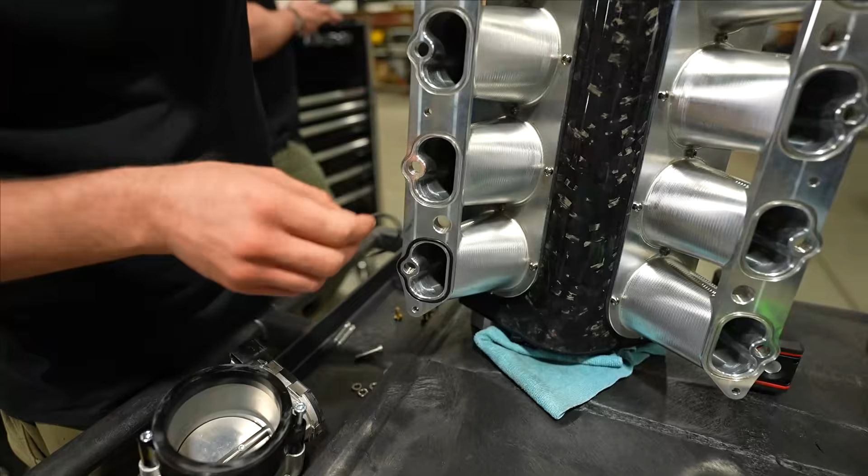All right, guys, today we're going to be testing our S650 carbon fiber intake manifold, obviously for the 24 and up Mustang. We've been working on tuning for a while to get the RPM and get the power curve where we want it with the factory manifold, and we're pretty happy with where it is. So we got that ironed out. We're going to swap over to our carbon intake manifold so we can get a nice comparison for you guys. So let's dive into it.

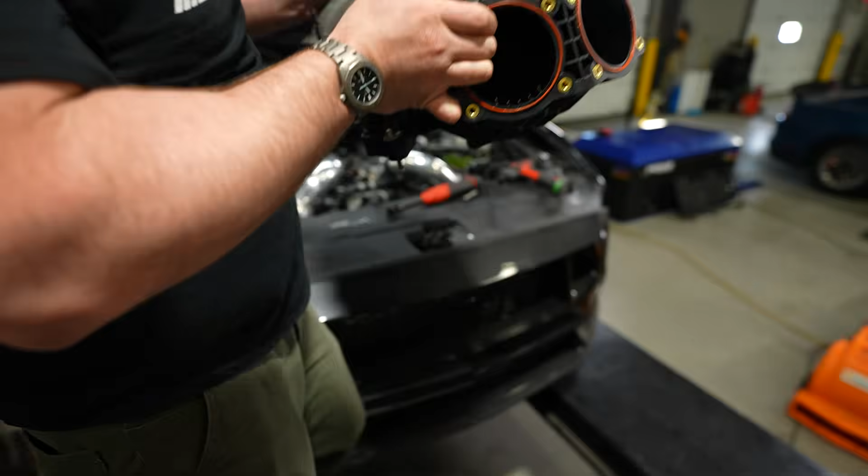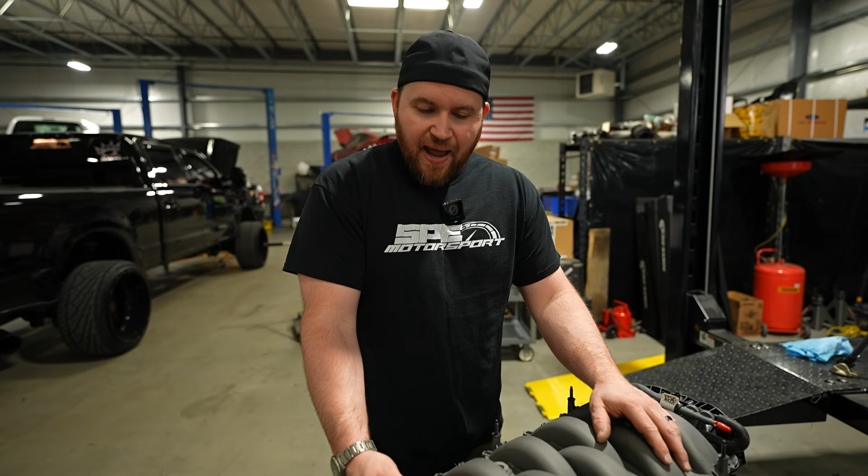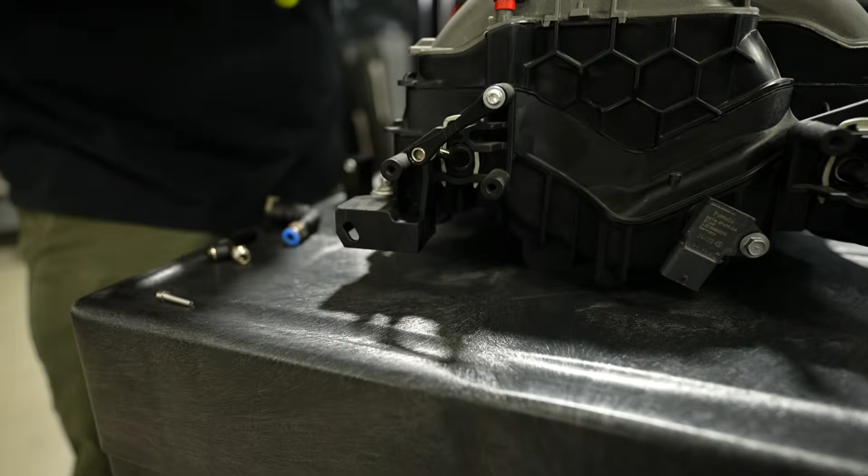So on the back you have IMRC canisters on the stock cars which actuate the IMRC flaps inside the intake manifold. So we have our lockout arms on it. This is something you're going to want to do in a boosted application. I'm going to take one of these off for you so you can actually see how this works and explain why you don't want it on a boosted car.

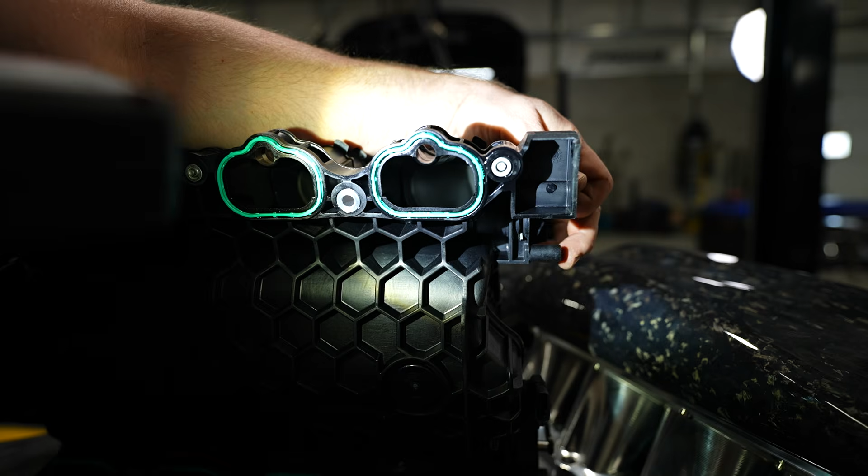All right, so the runner, when it's locked open, it looks like that. So that's basically wide open throttle. The top half of the RPM range, it's gonna look that way. At the bottom half of the RPM range, this flap's gonna be shut. And essentially what it does is it blocks off the intake runner, giving the engine a smaller intake runner, which therefore gives the motor a little more torque at the bottom RPM range.

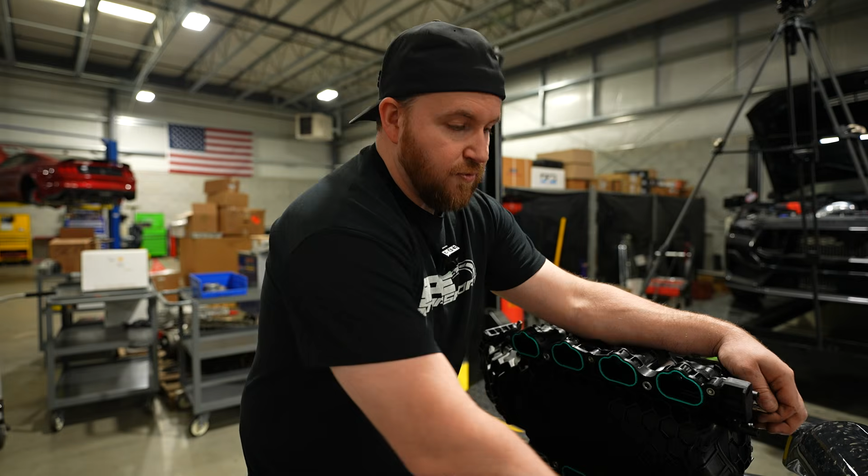So in a boosted application, when you're trying to build boost, you really do not want that runner shut because you're really impeding airflow. So that actually hurts getting the turbos into boost pressure. So these are really a necessary evil whenever you're running the factory intake manifold.

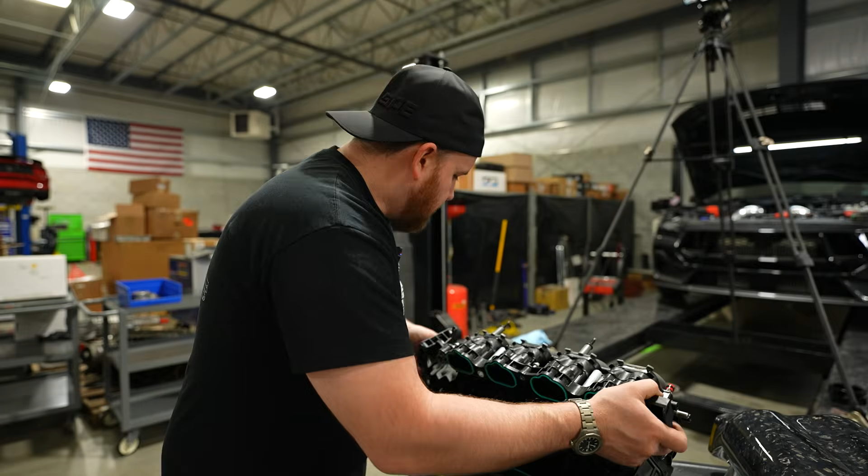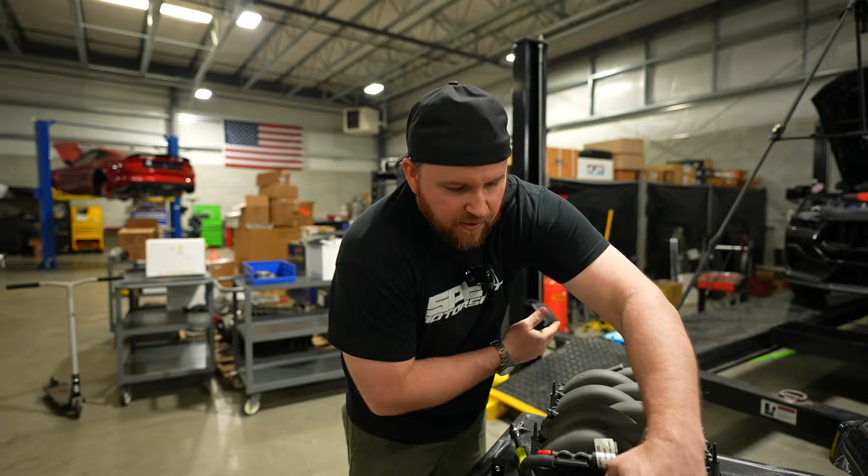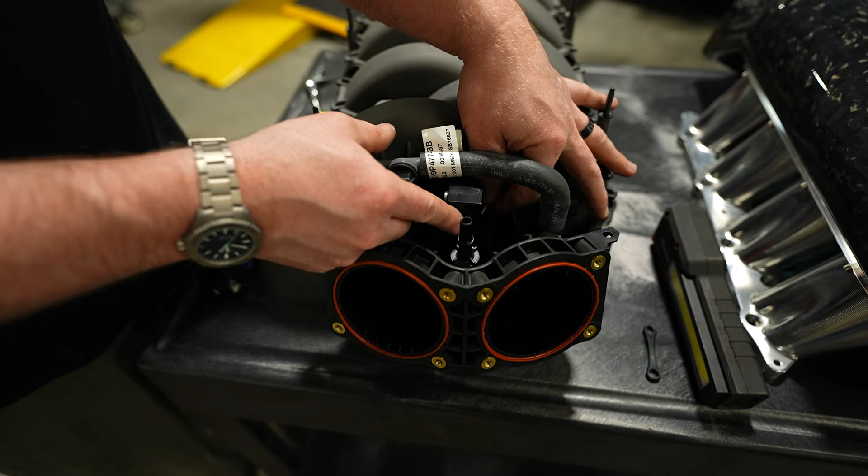The other thing that we have for a factory manifold, if you're going boosted application, on the front here, this is a vacuum line that will no longer be used for the crankcase vent stuff. So what we do is we make this block. It's real simple. It's got an O-ring in it. It acts similar to a quick connect, and it pops on here like that. You'll slide your bolt in to lock it down, and then you're able to use different fittings if you want to run a boost controller, a boost gauge, something like that.

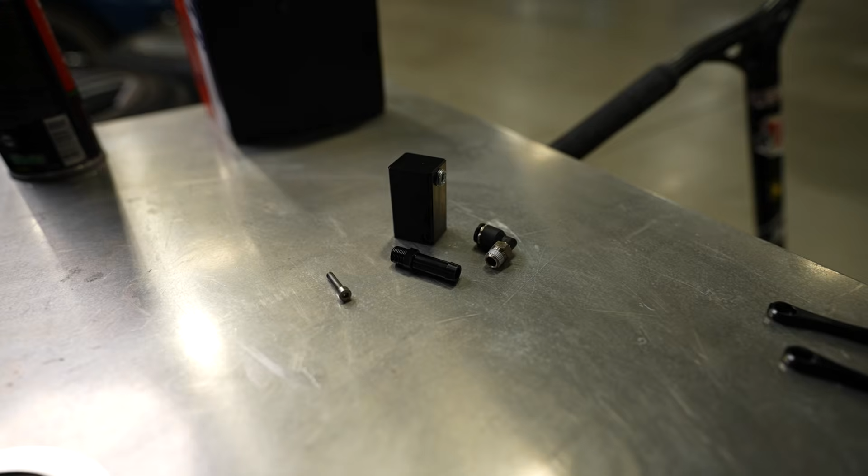You have different fittings, different hose options, and this basically converts this large quick connect over to an 1/8 inch NPT, and there's two connections on this block. The factory car has basically, let's call it a vacuum only sensor. So it'll read up to 1 bar, which is 1 atmospheric pressure, and then down from there. So essentially the factory sensor is able to read vacuum and up to 0 pressure.

When you go to a boosted application, more than likely your tuner is going to require you to change that MAP sensor. There's a lot of different options from Ford, MAP sensor wise, that you can be running. So this is an EcoBoost sensor that we end up having to cut the cage off of because they're real bulky and they're really long.

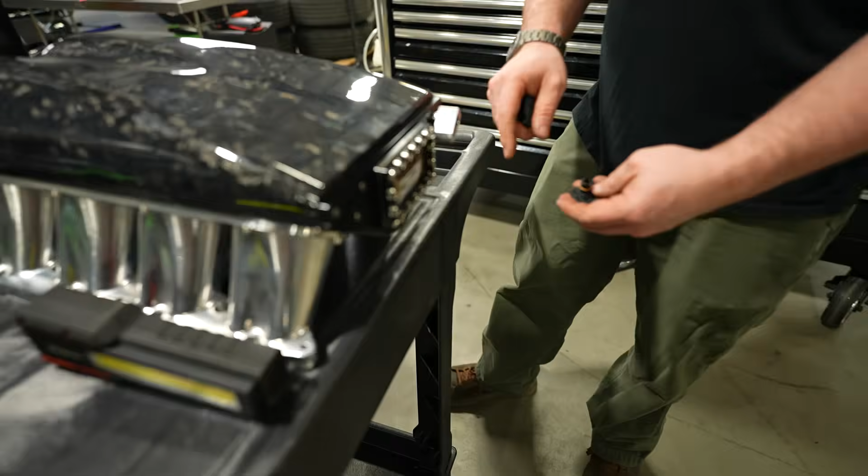The easiest way for us to deal with that, because of our adapter that we're running on the back of our intake manifold, it's obviously set up to run this bolt pattern for the sensors, the depth of it, we didn't want to make it too tall, too bulky, so it's easier just to snip the cage off. This is still really well supported. It's a temp sensor and a pressure sensor, so it does have a lot of support in there. It's still completely covered once you get it in there.

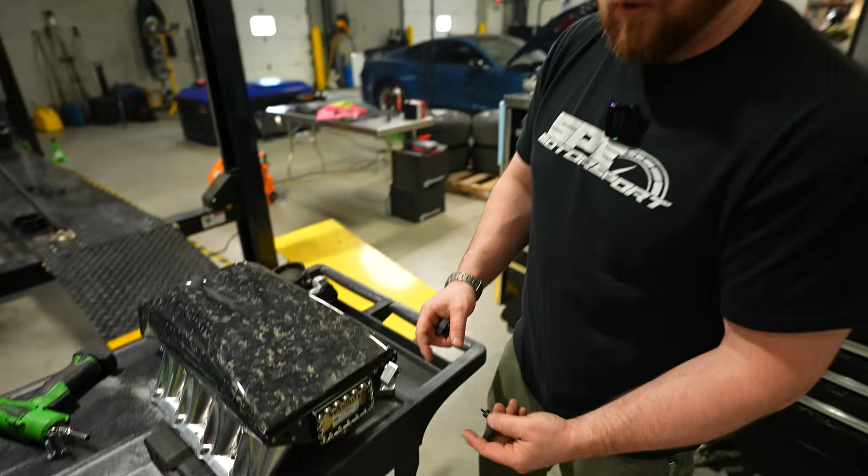So the whole point behind us doing this adapter was, if you ever switch the car over to a standalone down the road, or you need to do a different MAP sensor, you can literally unscrew this adapter, thread a standard 1/8 NPT MAP sensor in, and you're ready to go. So it gives you more flexibility. You can run factory sensor, you can run an aftermarket sensor in this manifold. It basically is designed to work with whatever you want to run. We're gonna go ahead, swap all this over, get it on the car.

All right, guys, we got the carbon intake on the S650. Everything's good, checked for leaks. We're solid, we're good to go. We're gonna show you guys the clip of the original intake, the stock intake manifold, show you the power numbers it made.

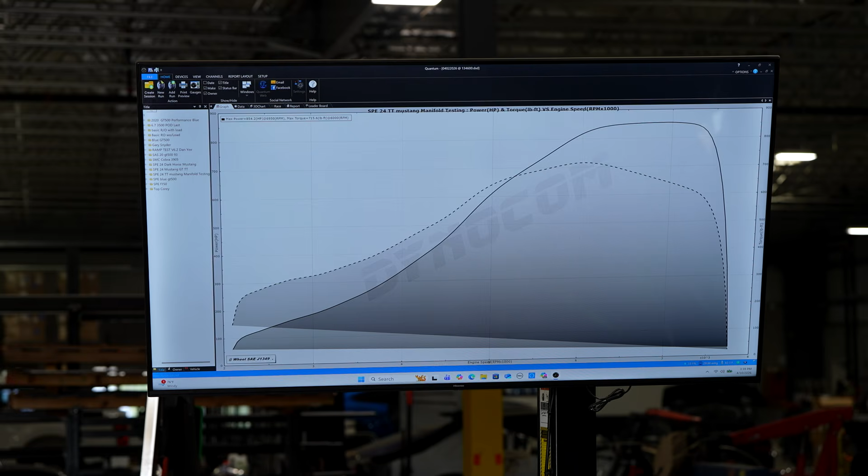All right, now we're gonna make some pulls with the new intake manifold. As I said before, we're gonna do the same boost level. We're not changing anything in the tuning. The only thing we're gonna do is log it and show you the new power update.

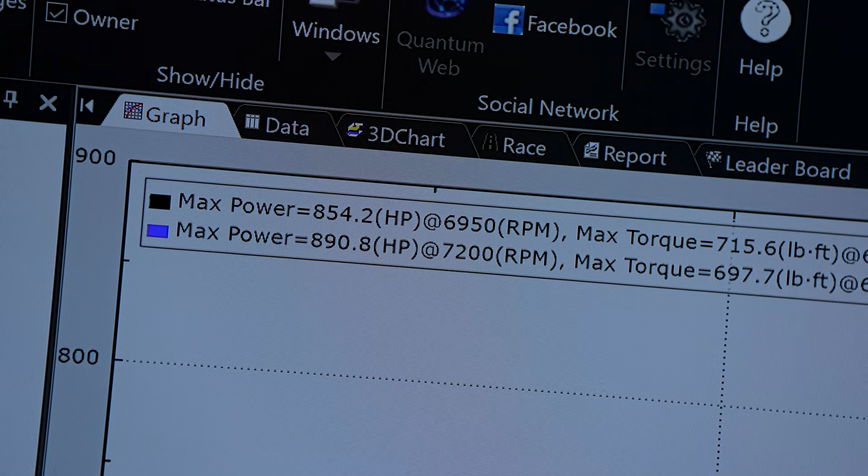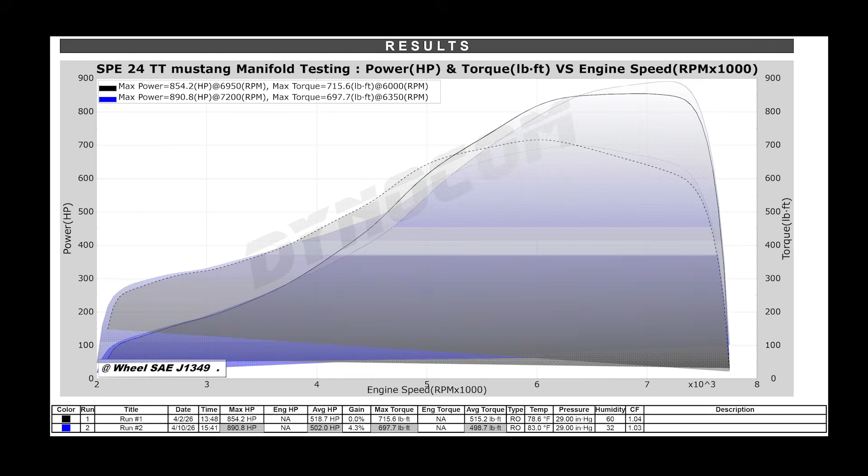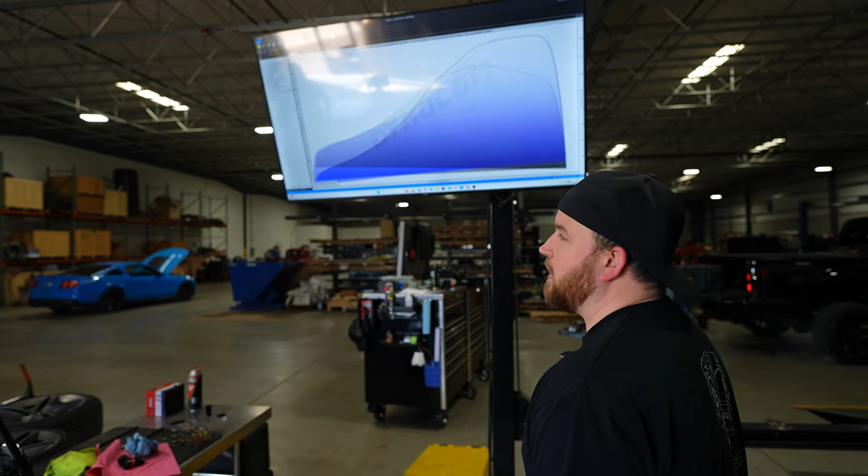Yeah, everything looks good. We're good on fuel pressure. Air fuel's right. Yeah, other than just gaining power, we'll take it. We didn't change any boost. We lost, what do we figure, about 5 foot-pounds, 10 foot-pounds, no, 18 foot-pounds of torque roughly, ish.

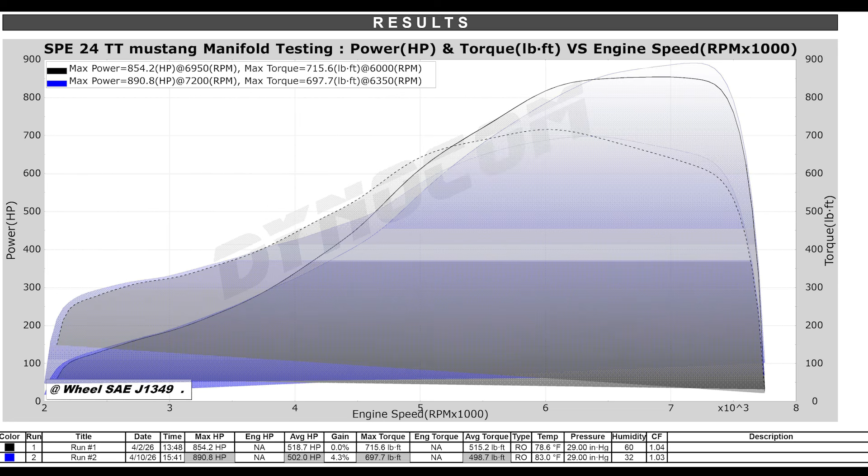So, blue was the last pull. Peak moved out from 69 to 72, which we kind of figured. And then it started to roll out. So that tells me, looking at this, if we start turning more and more RPM, it's just gonna continue to climb peak power wise. Because we're still on an up ramp right there, right before we start nosing out around 76-ish. So that's a pretty solid gain.

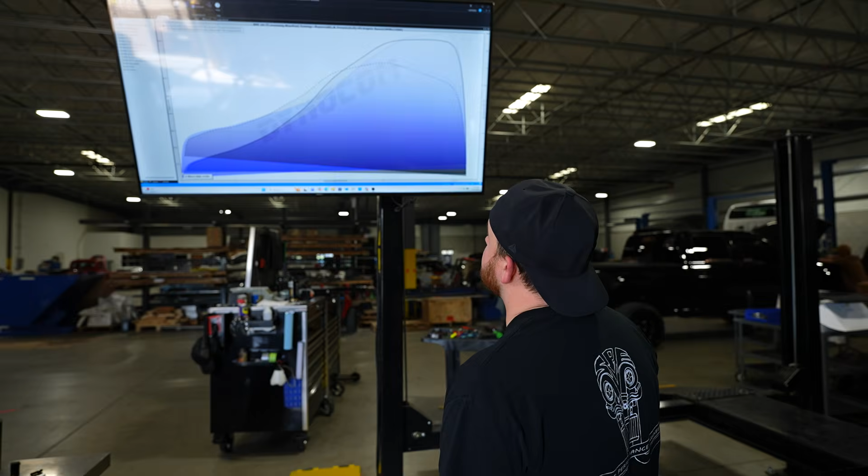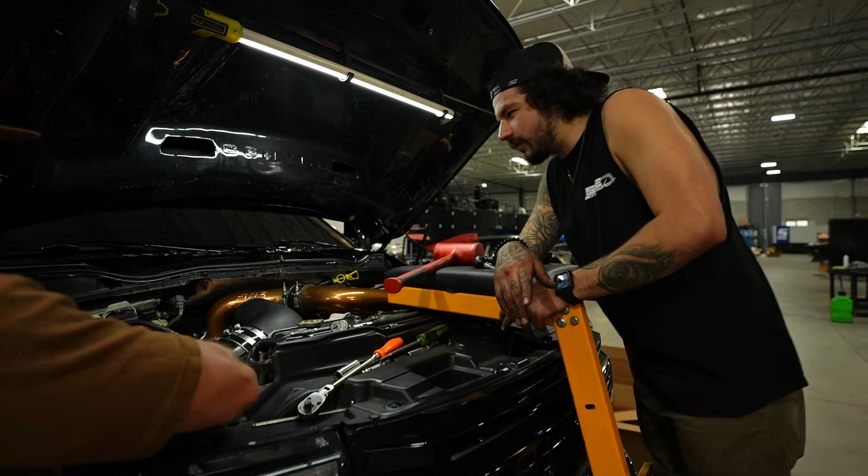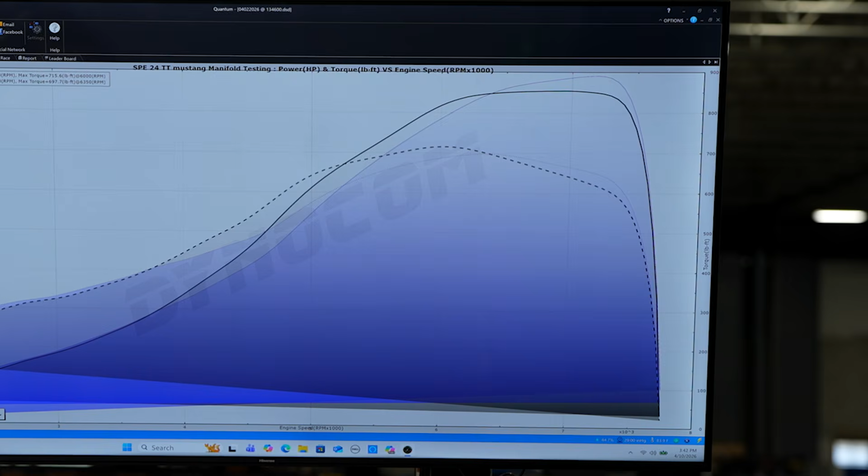In my opinion, this makes sense on the initial hit because it allowed the chargers, there's like less restriction. Charger hits. And then it actually starts using the plenum and the runner design, which is obviously not going to be as torquey, and then carries up through. But you can see the factory manifold lay flat and then fall off. That is just continuing to go up.

So it's like I was telling Huggy, right before we made the pull, I'm like, all right, I'm always waiting for the CFD and the software to screw me and let me down. And so far, it hasn't. So. Yeah.

All right, we got Rick here barring the shop per usual. I'm always mooching. What's up, y'all? He's trying to get a job here. Yep. I told Ron I'm not to fire him if he takes a spot. But anyway, what'd you do today?

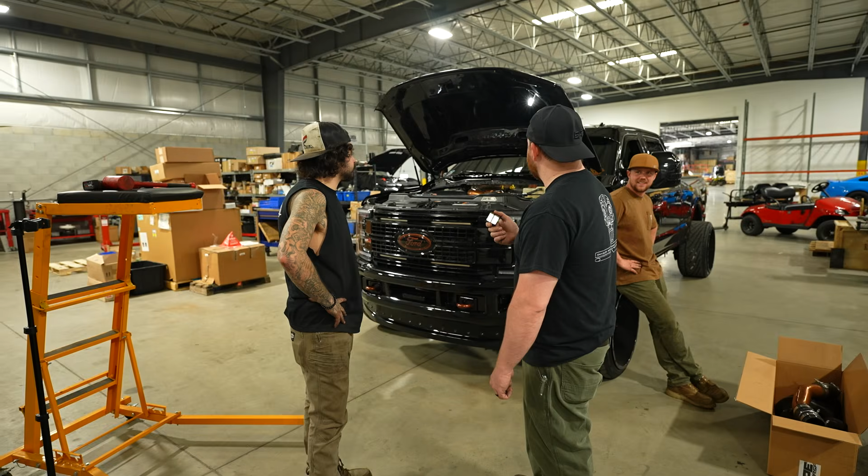So, the new S400 series Emperor kit is now on the black truck. We went with the S467, got the big AF intake, and yeah, John rips. You know what I'm saying? Yeah. So, Spoolie boy. Obviously you haven't driven it yet. No, not yet. But you just loaded a file in. What do you think is going to happen? I don't know. You think you're going to like it over the 300, or the 400 better? I think I like this better. I did like my 300, but bigger is always better.

That's what they say in the South, you know. Yeah, that's what they say. Is that why your truck's black? That is why my truck's black. Okay. We put street tires on it now, guys, because you know, race truck. Oh, you know. Wow. Yeah.

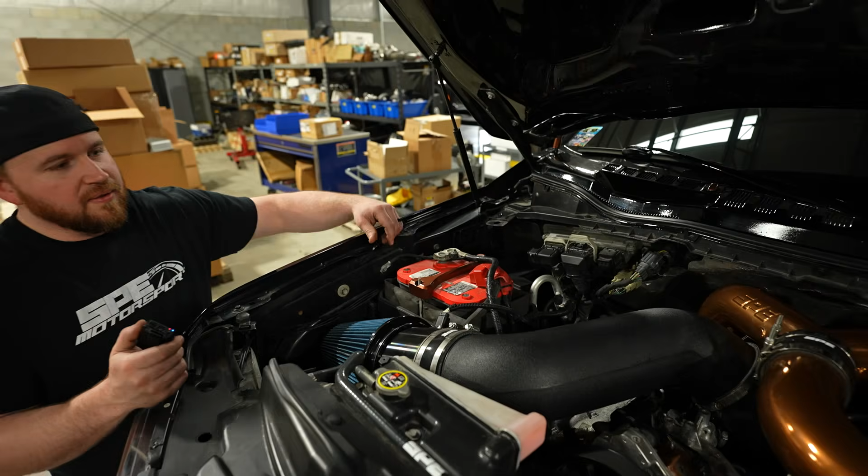Okay. Yeah, but super excited. So hopefully it's gonna spool pretty dang good. It sounds nice. So, how was the monster intake to put on? Super easy install. The mounting, I like the way it's designed. This mount bracket right here goes off of a factory stud you already have. They supply a nut. Bada bing, bada boom. It's like a stainless bracket that runs down to the valve cover, but it allows everything to move. So you don't have to worry about breaking a bracket or anything.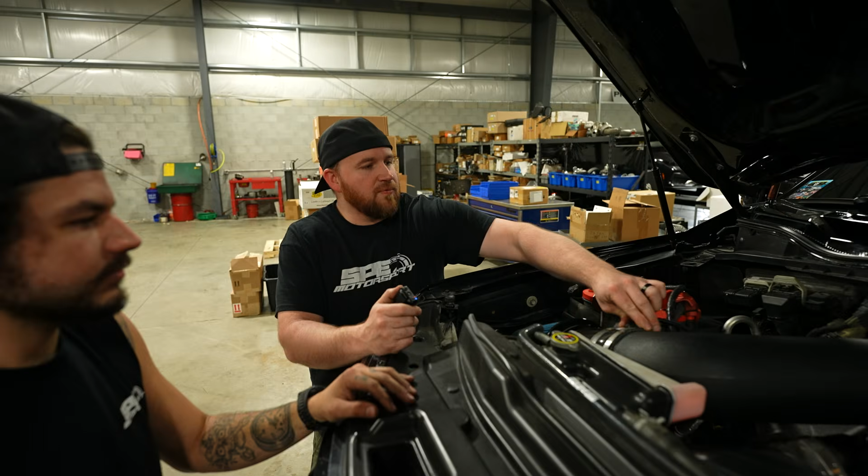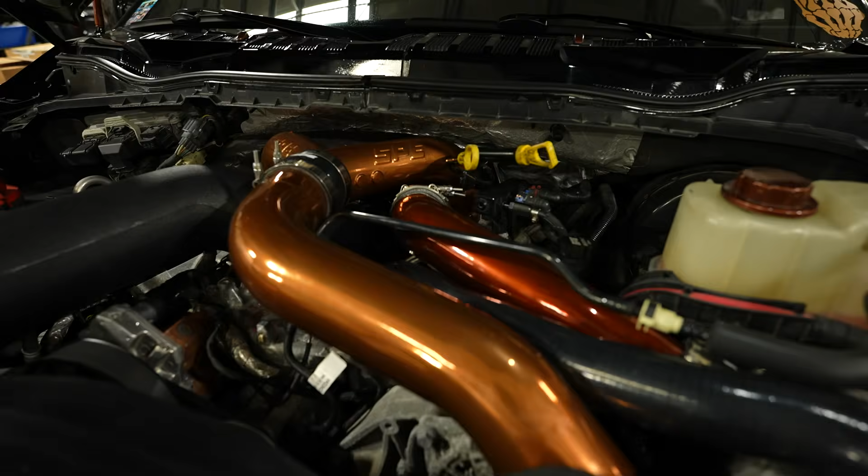And we use pretty much all the space. Oh, yeah. So was that a pain in the butt? No, not bad. I mean, it is legit as much room as you can get, perfect. What'd you think, Ron? Was it all right? It wasn't bad. I watched Rick playing with it, and I probably egged him on more. I'm like, dude, if you need a hand, I'll give it to you. And he's like, no, I got it. That's usually how it goes around here, you know? It only took like 5-10 minutes. Nice. Yeah, so we're super excited.

Sweet. So you're going to have this at UCC, right? Yep. He's racing it. Oh, shit. Well, in the parking lot at the Motel 6, we're gonna put the CP4 back in it. Well, if somebody wants to check it out, it'll be out there. This will definitely be in the booth at UCC. Shout out to these guys for always having me there. So, yeah. Fire it up. See if you got some gas in it.